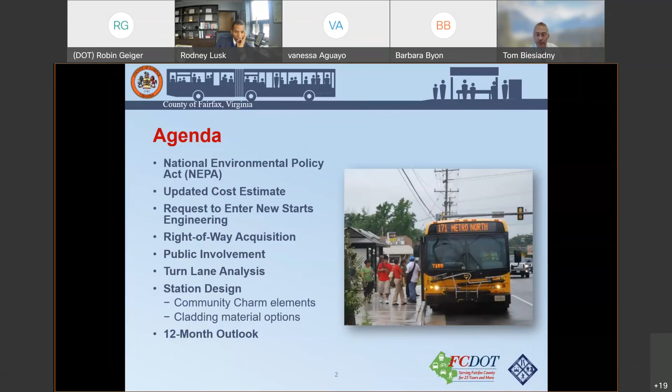Environmental status: the Federal Transit Administration signed our categorical exclusion on January 7th of this year. That was one of the major milestones we had to complete to finish the project development phase. This allows us to start right-of-way acquisition and also allows Fort Belvoir to develop a record of environmental consideration, or REC, if you hear us use that term. As we continue design, we do anticipate having to do a reevaluation, specifically to accommodate the decision to go with battery electric charging facilities along the corridor. Next slide.

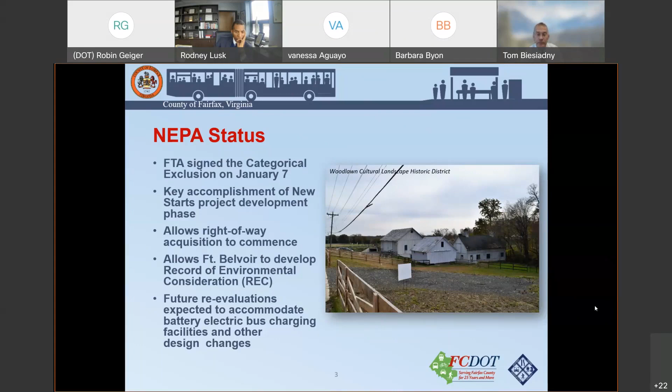Capital cost estimate: our figure is $730 million, based on a 20% design done around July of 2019. Since then we've progressed. We did an estimate at 30% design in early 2021, and as you might expect, real estate really took a hit. We were looking at a change to the project cost of approximately $145 million. So we took two steps: a cost reduction analysis done over the spring of 2021, and then continued with the value engineering effort that we do on almost all of our bigger transportation projects, completed over the summer. With those two efforts, we brought the cost at a 50% design down to about $795 million, completed in December of 2021.

Next slide. Here are some of the key causes of the increase. One is escalation due to the schedule extension to reaccommodate the VDOT widening project, which involved right-of-way acquisition and utility relocations. Our previous estimate looked at 2025, 2027 for some of these activities, but with our updated schedule, those escalation factors had to be incorporated. No surprise, all around the country we're seeing a really active real estate market, and that was the biggest bump we saw when we relooked at these estimates. We also know the board took action on switching to battery electric buses and charging equipment, so we wanted to make that change to align with the board and their policies. And then there's global construction materials and market impacts, like prevailing wages, that we're also factoring in.

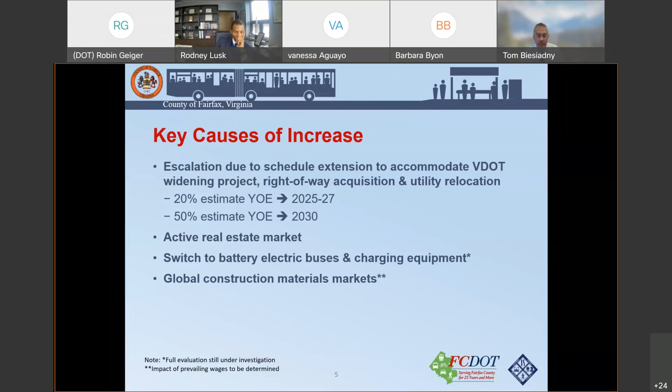Slide 6: you may remember an email from me requesting the request to enter engineering. This is Phase 2 for the New Starts, or Capital Investment Grant, program from the Federal Transit Administration. We just submitted that request in January of 2022.

Part of that request includes having the completed environmental document, design plans that we had to turn in, our project management plan, cost estimate. You can see the laundry list here that we had to pertain to, and this is all part of what is requested of us as we continue through this project.

The other thing we would mention is that the FTA has also given us a program management oversight consultant, or we call them the PMOC. They are the ones that will make the recommendation to the Federal Transit Administration of our readiness for entry into engineering, that second step that we keep referring to for this investment grant.

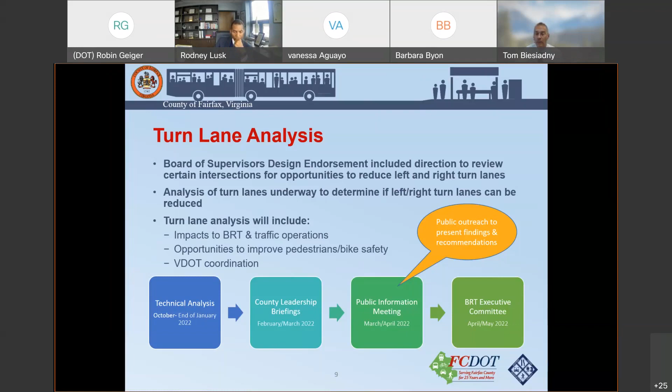Next slide, please. So, community charm.

Today we're asking for your feedback and maybe even approval on our approach to doing community charm. Just as a reminder, since it's been a couple of months, the point of community charm is really to reflect the history, identity, and character of the neighborhoods surrounding each station area.

The CBCs are named differently, and we understand that along the corridor each neighborhood is different, so we want to bring that out by incorporating community representation. From artwork, one of our goals will be to work with high school students and local artists, and then integrate the artwork at each station with design parameters we'll be discussing later, so there's still a unified experience as you go through each station.

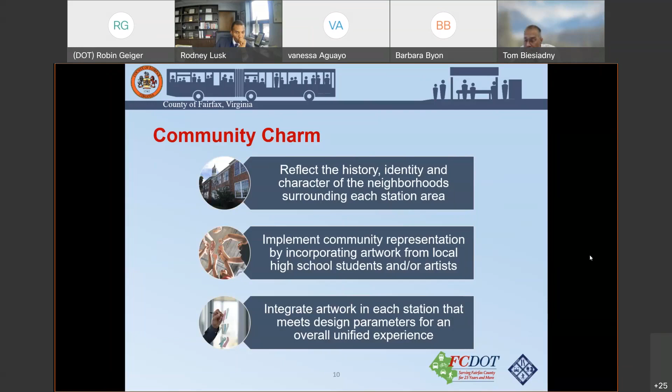Just for background, we've shared this with you before, but wanted to bring it up again since it's going to come into play later. Back at the end of 2020 and early 2021, we did a survey and asked the community what they want to see and where they want to see these features: windscreen, art in plazas, panel, paving, railing station.

You can see here the outcomes from those tallies, or what we found from the community. The biggest one, which everyone unanimously voted on, was to have that art displayed at the windscreen design, with sculpture paneling coming in second.

At our meeting in April of 2021, with direction from you guys, we took note and did more research, and we all agreed that the two locations to display this community charm would be the windscreen or the sculpture.

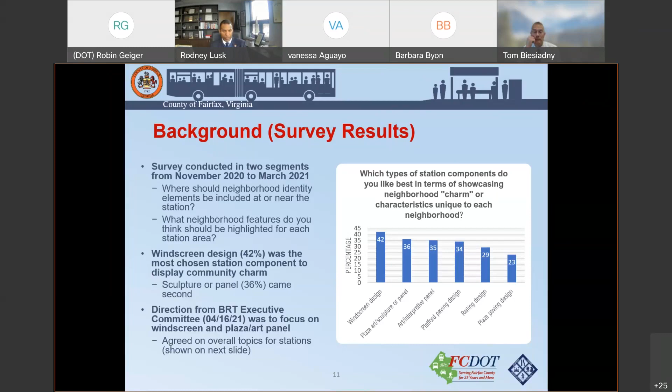What we also found from the survey results was what people were interested in seeing at each station. I won't read through all of this, but most of these we agreed was no surprise. At Huntington, they were looking at the history of Richmond Highway, a gateway to Fairfax. Beacon Hill was the historic airport and the view. Gum Springs was Gum Springs and African American history. At Woodlawn it was the history of Mount Vernon and Woodlawn, and at Fort Belvoir it was military and culture.

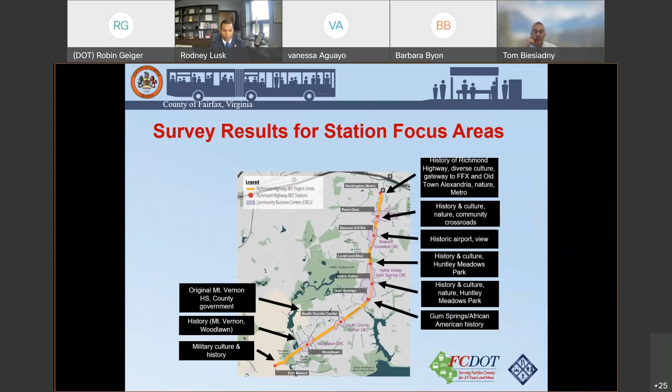I think we all agreed these were nothing different than what we would actually find given other aspects of history and information we have for the corridor.

Now comes our recommendation. Our recommendation would be that we use that information we have about where our charm features are going to be, and really integrate that into the windscreen or back screen for the project. After doing more research with our architects and looking at other systems, we felt that the maintenance of it was much easier, and frankly, there's the funding part.

Back in 2014 or 2015, the Federal Transit Administration stopped participating in artwork. There used to be an Art in Transit program that was established, and that's no longer in effect. So by the windscreen being a security feature and protecting from weather and other things we want, part of the funding will come into play with that, so we want to play off of that a little bit.

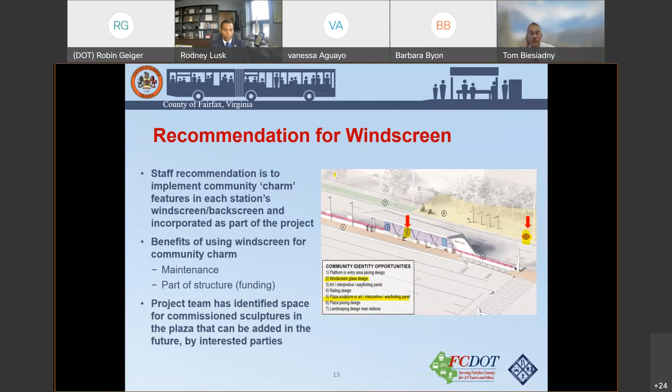Just a little further on those topics: we talked about how at Huntington Metro, people chose history and culture, but what does that really mean? Here's a breakdown of topics we've heard, and we'll use these to go out into the community and let them tell us - yes, that's what they meant when they said airport, or when they said nature, they were talking about Huntley Meadows Park, for example. So we'll do a survey and start doing pop-ups and meetings.

So when we're talking about this program and how we anticipate doing this, we're looking at it in two rounds of public meetings. In round one, we're going to go back and present the information I just shared to the community, introducing that we're going to do this with the windscreens, and here are the elements or type of information we want to collect. That'll be an opportunity to make sure we're on the right track, that this is what they want to see. Then we'll move into part two, coordinating with the Department of Planning and Development and the History Commission on each of those topics.

We're also looking to collaborate with the Arts in Fairfax at the appropriate time between those three, making sure we have the correct history and facts so we can integrate that. We've also reached out to local high schools such as West Potomac, Edison, Mount Vernon, and Bryant to see if the high school kids are interested in participating, and really be the ones to come up with what this looks like. We think it's the best way to get them engaged, because at the end, this is their system - they are our future. So we want to get them involved and incorporate as much of this as possible. The good news is we did hear some interest back, which we were worried about, that no one would reply. So we did get some interest.

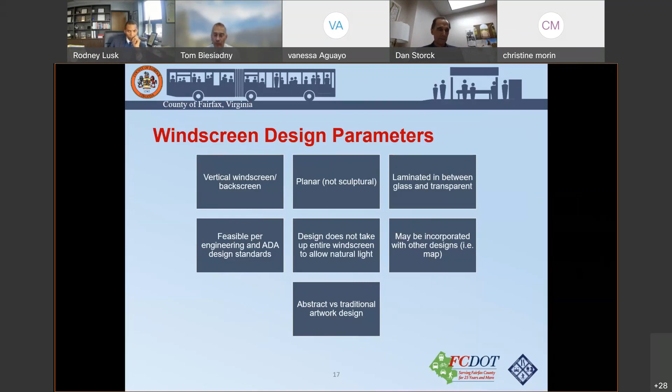I have another question, if we're ready to move on. Yes, we're still taking questions. Do you want to move on or still have questions? No, I have another question, if it's not on this topic it would be on a different topic. Okay, well let's go to the next slide.

Let's go to the next step slide, and if you guys are ready, we can take action on allowing this. The action would be taking staff's recommendation to use the windscreen as the element where we're going to do community charm. I don't think we need to take action on the approach; we can work with you on that. So that's really the action for today.

So, Vanessa, I'll move that the executive committee endorse using the windscreens for the community charm. This is Barbara, I'll second that.

Question on the windscreen. I think I asked this before and I'm not certain of the answer, so I'll ask it again to be more certain. The windscreen, do we see these as essentially permanent designs, or will they be of shorter term duration, or some combination of both?

Yes, I think that's still something we can decide upon. Lara Hegler, I think we have the station architect online, right? Correct, Laura Jeffords is here as a guest. Yep, we are here. Thank you. Can you give us some insight on what you found or what you've been looking at? It's been our experience, I'll go first.

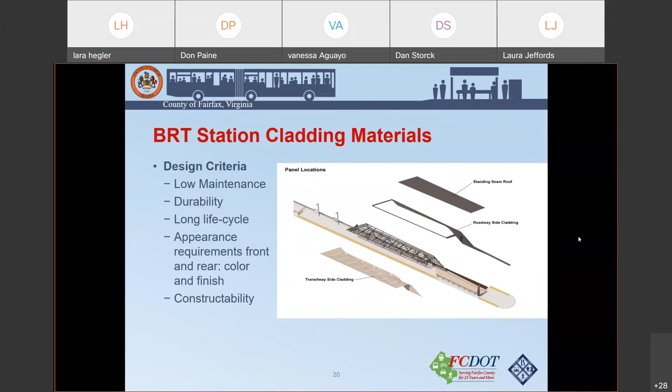Next slide, please. So here are the options we evaluated: aluminum composite material, high density fiber cement, and glass fiber reinforced concrete. I won't go into all the little details, but I'll just tell you we looked at the aluminum composite because that was the material that was going to give you that shiny color and effect we were looking for. The other high density fiber cements and the glass fiber still did some of that color we were looking for, but they're just not going to give that glossy finish.

So you can see we've kind of grayed out the aluminum composite material, because while it gave you the shininess and glossy effect, we were going to lose out on a lot of the rest of it - the durability, the warranty, maintenance, curved surface. If you can imagine, we just had a snowstorm, and having something shiny like your car, with the snow and salt and whatever else, it was really going to make it a much higher maintenance need for these stations.

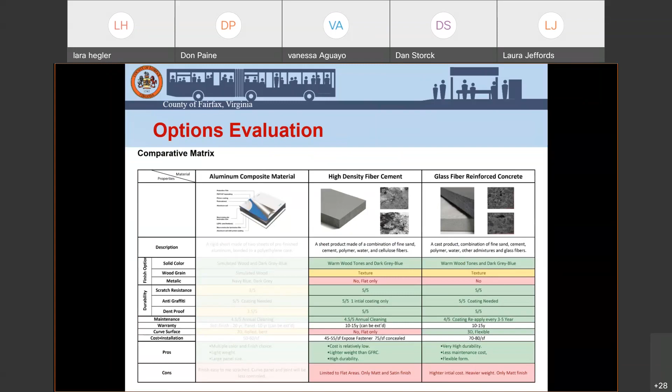So we don't think we can deliver on the aluminum, but we are still looking at two other materials, the high density fiber cement and the glass fiber. Let's go to the next slide so you can get a feel for some of those.

So here's a high density fiber cement - you can see there's a color there. We're still looking at what type of colors and talking to manufacturers. You can see here to the right there are three examples where they've used this, including the Metro station here in Santiago, Chile. Again, just to give you some examples of how other buildings and stations have been able to use this material. Let's look at it in context in the next slide, please.

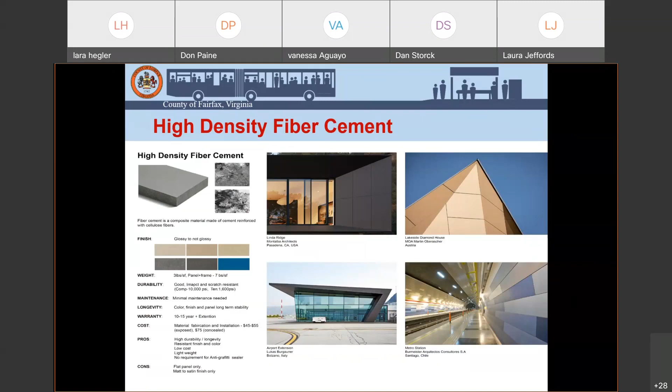In regards to weight, durability, and maintenance, they are both very similar. So the good news here is that we're giving you an update. We want to continue researching these materials, but whichever one we choose, it's going to have the same durability, longevity, and weight, so we can continue our structural design for these, which is great, so we don't slow down the design.

The other thing I would say is that we're also getting you samples. By next week, we should be able to deliver them to your offices. Laura, correct me if I'm wrong, we only have one sample. I mean, we have two samples, but only one set. Or did we get two sets?

Don sent them out yesterday, so he can clarify. Yeah, they should have arrived either yesterday or today. There is a box that includes the fiber cement and then two samples from the GFRC.

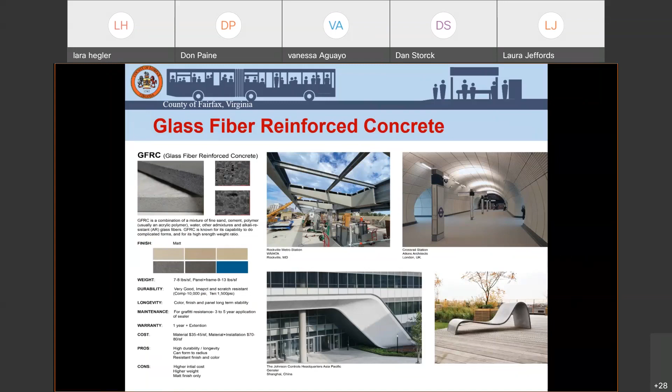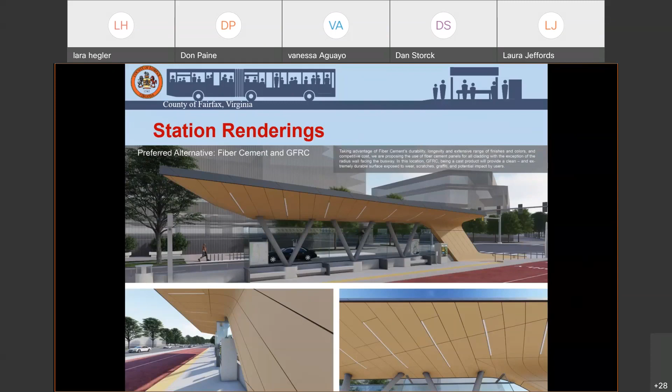Let's go to the next slide. Here's one just showing the background, or the back, of the station. Next slide. Actually, before we go on, does anyone have any questions?

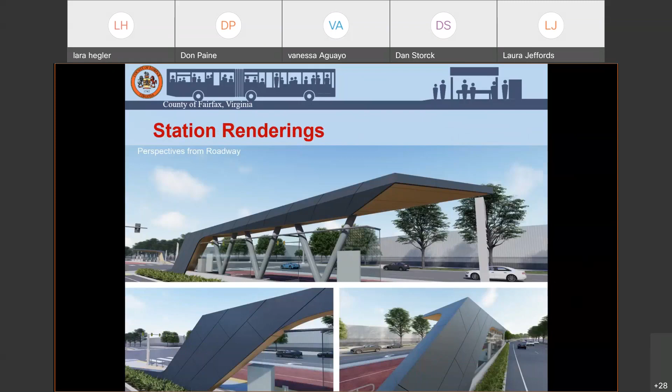Okay, let's go to our 12-month outlook. We talked about having a branding rollout in the next month or two. We're still working on our bus propulsion technology review, changing the system to all electric. We're on our way to completing 60% design for roadway and stations, looking to deliver that in late spring. Approval to enter engineering is expected in the fall. Right-of-way acquisition and demolition is ongoing and really picking up. Our third-party coordination along with utility coordination is ongoing, and we continue to make progress on both.

Next slide. All right, so we had a question slide, but with six to seven minutes to spare, any questions on anything? Do we want to go back and review anything?

Hey Vanessa, John Lynch here, just on the turn lane public hearing, was that going to be combined for the entire corridor or just the Fairfax County administered project?

Well, I guess that was my plan. Okay, no, I think that's fine. I think that's the right way to go. I just wanted to check. Yeah, okay, good. I think our teams, John, just so everyone knows, we've been working very closely on this, coordinating with each other every step of the way. So I figured we might as well do it all at once. And frankly, when we get questions from the community, both teams are there to answer them. It's not a case of 'well, VDOT's not here, they can answer it later.' So that is our plan. Okay, thank you.